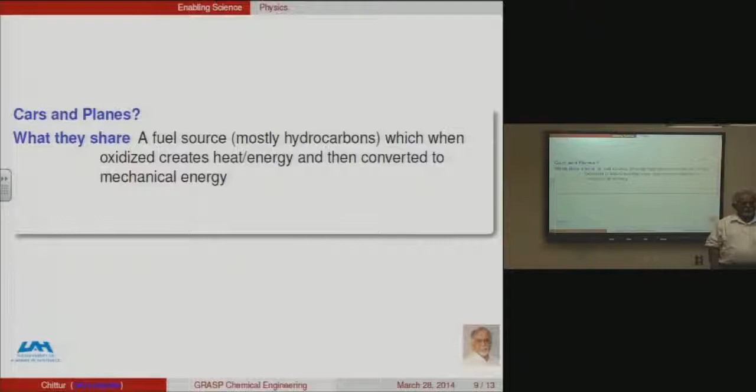All right, so let's continue talking about planes and the concept of the lift, for example, and the Bernoulli's principle, right? But before we go any further, let's ask a question. What is the similarity? Remember in the first couple of weeks, second, third week, we talked about automobiles. We talked about the combustion of fuel, the oxidation of hydrocarbons to create carbon dioxide and water, and the energy that was used to move the cars, right?

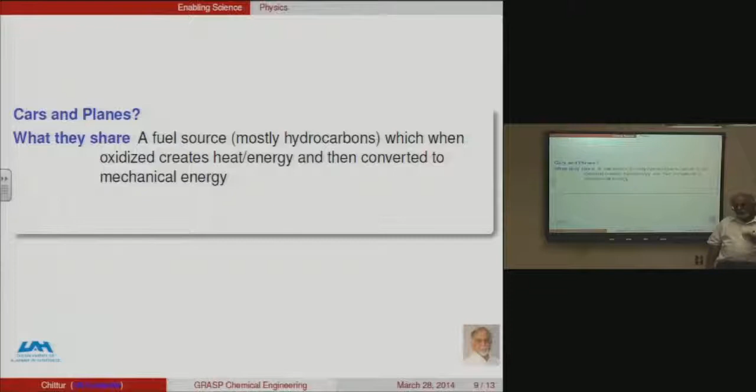So what's similar between automobiles and planes? In one sense, they're similar because you're burning a fuel that creates heat and energy, and then it's converted to mechanical energy, right? How do they differ? Well, the first difference is that in automobiles, the combustion occurs in a chamber, right? It pushes the piston and therefore pushes the tires, and therefore you move the car forward. And the kinetic energy is used to take care of the air resistance on the car.

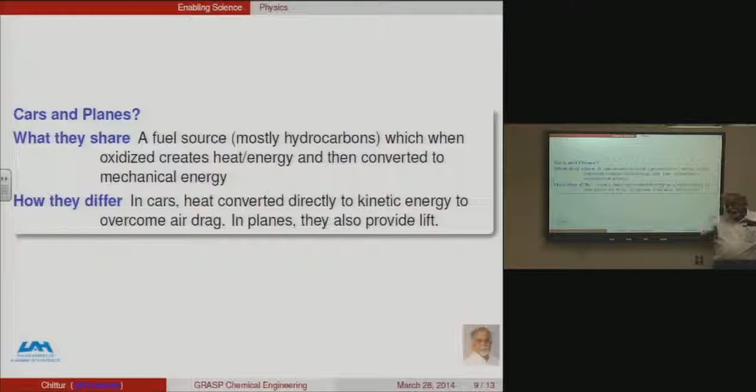In planes, that also happens, right? You need to be able to move forward. But in addition to that, you need to provide lift. And so the key there is that you need to burn them in such a way that the air will be flowing around the wings in such a way that you'll also have lift. So in one sense, you have forward motion, kinetic energy in both cases, but in the case of a plane, you need to have lift. So you need to design the plane in such a way that you'll also have lift. Okay.

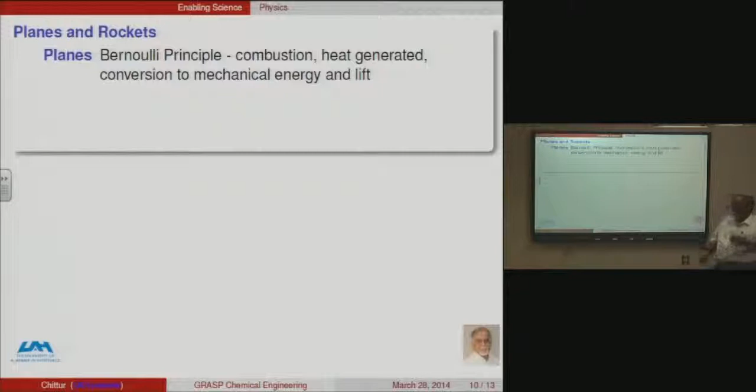What is the difference between planes and rockets? If you've heard about going to the moon, to space, and so forth, right? For planes, the core principle is the Bernoulli principle. That is combustion, the heat that is generated, the conversion to mechanical energy, and then designing the wing in such a way that you actually get lift, right? You design the wing so that you get lift, and the plane can go up and also go forward because of the kinetic energy from the burning of the fuel.

In rockets, the key principle is not the Bernoulli's principle, but Newtonian mechanics: every action has an equal and opposite reaction. You must have heard about it, right? And the other important thing with rockets is that on Earth, and even for planes at fairly high altitudes, the oxidizing agent, oxygen, is in the air. So automobiles and planes carry a fuel, but they don't carry their own oxidizer. For rockets, on the other hand, for it to go to the moon or wherever, you need to carry your own oxidizer. It could be liquid oxygen, for example, or some other oxidizer. So that's a key difference, right?

The other difference, of course, is the Newtonian mechanics; it's not that it doesn't use the Bernoulli principle. For example, you can imagine that the space shuttle is trying to land. It lands like a glider, like a plane. So obviously, the wings are designed in such a way that it can land in a controlled fashion. But for the most part, you're looking at Newtonian mechanics principles, where the gases that are created and burned in these chambers are expelled with such a high velocity that it propels the rocket in the other direction. So that's the other key difference.

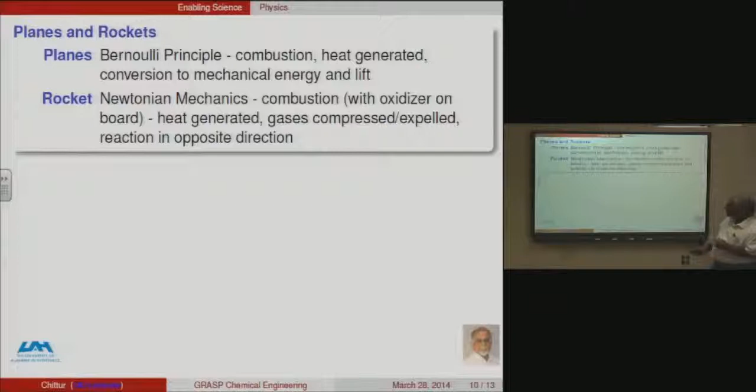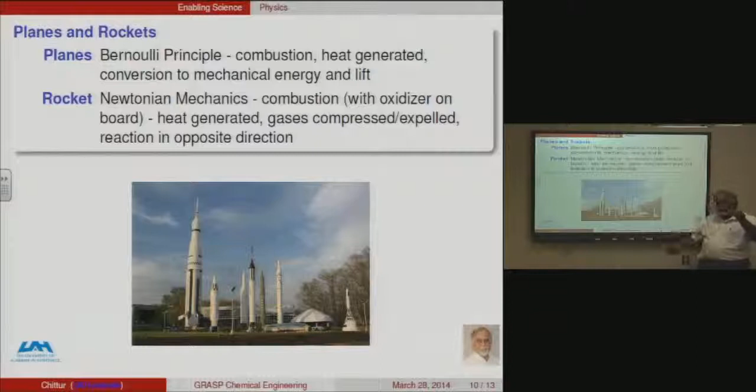And if I'm not mistaken, this could be from our Huntsville, Alabama Space and Rocket Center with a bunch of these Saturn V rockets and other types of rockets. And the key here is that unlike planes, it carries a fuel that is burnt and the oxidizer at the same time. Okay, so the plane, as I said, flies because of the Bernoulli principle. There's a pressure differential, right?

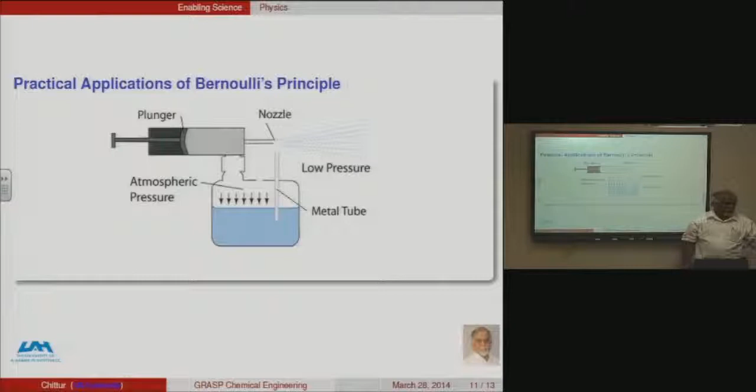So what we're actually doing is using the principle that by pushing air at a very fast velocity past a certain location, we are reducing the pressure, thereby actually forcing liquid up a certain tube. So it's a good example of use of Bernoulli's principle.

Another one is about boats, and if you remember, I think in week 2, I had this picture of a boat. If you watch sailboats, you wonder: if the wind is blowing in a given direction, can the sailboats actually go against the wind, as it were? And the answer is yes. It depends on how you orient the sails in such a way that it can create a differential pressure and then have a net force in the direction that you want to go. And so again, an illustration of the Bernoulli's principle.

Now, I'm not a sailor myself, and I don't know how to use the sails, but the idea there is that you allow the wind to flow in such a way that you have a net force going in the direction that you want to go. So the principle is very similar.

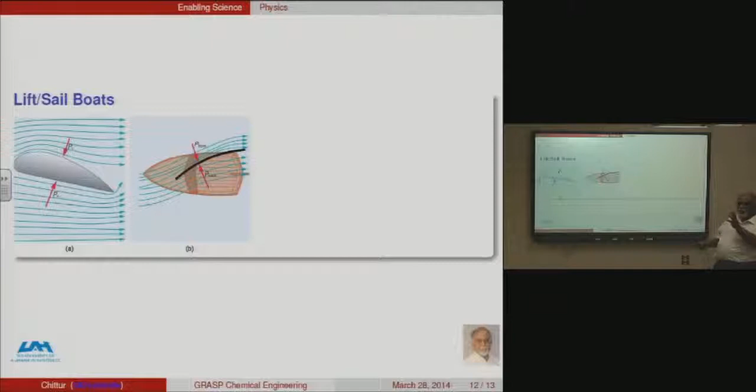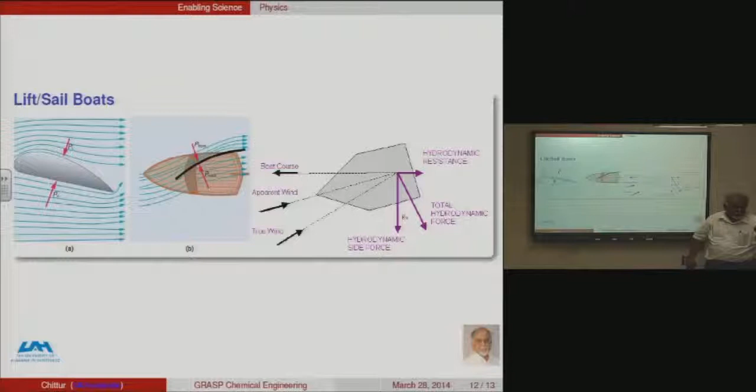If you can actually draw these force diagrams, you can show that in some cases, even if the wind is, for example, going in this direction, by adjusting your sails, you can actually make the boat go in a direction that appears to be almost directly against the way the wind is blowing. So it's an application of the Bernoulli's principle too. So it's pretty fascinating.

One other application I want to show you as a reminder. When we're in a plane, we want the plane to be in the air and not on the ground, and keep flying as long as possible, unless we want to come down. If you're driving a car, our objective is to remain on the ground, particularly with race cars. If you're going really fast with the race car, then you want to make sure that you stick to the ground as opposed to flying all over, right?

I'm sort of really simplifying this whole idea, but race cars, for example, are designed to be very stable and stay close to the ground. And so they think about how do you design the race car in such a way that the air is flowing underneath the car at a very high velocity, resulting in a net force acting downward on the car, keeping the race car right on the ground as you would want, right?

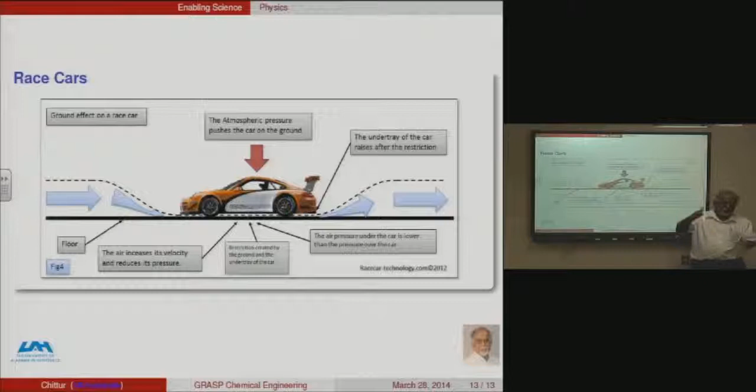So what we've done in these two videos is to link up an important concept called Bernoulli's principle, energy balance, to how planes fly, and to how boats are able to go with sails in a direction against the wind. And so I hope we can appreciate it the next time we get on a plane and look at the wings, and how those things are being moved around to adjust the lift, adjust the direction in which we're moving, and so forth. So I hope that was fun.